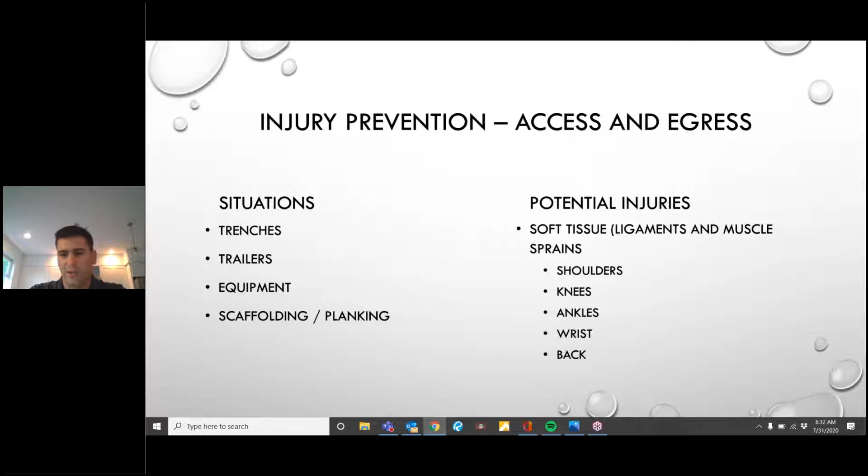The potential injuries we're trying to avoid are soft tissue injuries, ligament and muscle sprains. That's what we see when getting in and out of trenches, trailers, or equipment, or working on scaffolding or planking, when we slip a little and injure a shoulder, a knee, twist an ankle, hurt our wrist, or injure our back. So we're going to talk about those different scenarios.

The first one here is excavating and trenching. We want proper means of egress anytime our trench or excavation is deeper than 4 feet. But even at 4 feet, even at 2 feet, the constant strain of doing a 2-foot or 3-foot lunge out of an excavation each and every day adds up, because of the frequency, how much we're in and out of these things carrying tools and objects.

Anytime we can do a nice slope, like you see at the UVM project, on the left-hand slide, this nice gradual slope to get down and perform all the concrete and pipe work that needs to be done, it's a nice means of egress. On the right here we've got a ladder for trench work, so we can have good 3 points of contact getting in and out of our trenches.

We see a lot of times where an employee might slip, or the bank might give out - this is just a 2-foot excavation or trench where you slide down the bank. I think we've all been in those situations where you just slide in and out, and those are all opportunities for a potential injury or strain to occur.

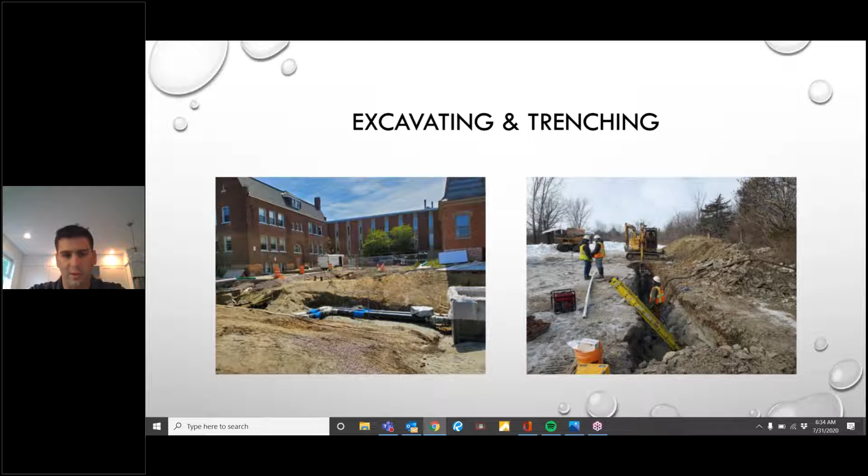So anytime we can have a designated means of egress, a nice earthen gradual slope in, that stone that can prevent any slipping or tripping hazards, is our best practice to avoid those situations. Now regarding trailers, we've had a lot of accidents in the last decade on trailers, and a lot of it's access and means of egress, jumping off and on like you see on the slide on the left-hand side.

How many times do we go up and down this? It's about a 34-inch drop off, constantly lunging, climbing. There's a high probability due to the amount of frequency and overreaching that has to be done each and every day to get up.

So we've purchased and invested a lot into these little step deck or trailer ladder systems that you see on the right-hand side. Easy means of egress, a lot easier on our joints and knees, to get in and out using 3 points of contact. It's a lot safer and more efficient, because we do appreciate the sense of urgency all of our employees give each and every day.

But again, we don't want you to sacrifice your health due to that sense of urgency or potential unsafe behavior preventing a shortcut. So let's think out of the box sometimes about how we can make an activity safer and easier on each other. Adding ladder systems to our trailers is something we've been doing for the last 2+ years.

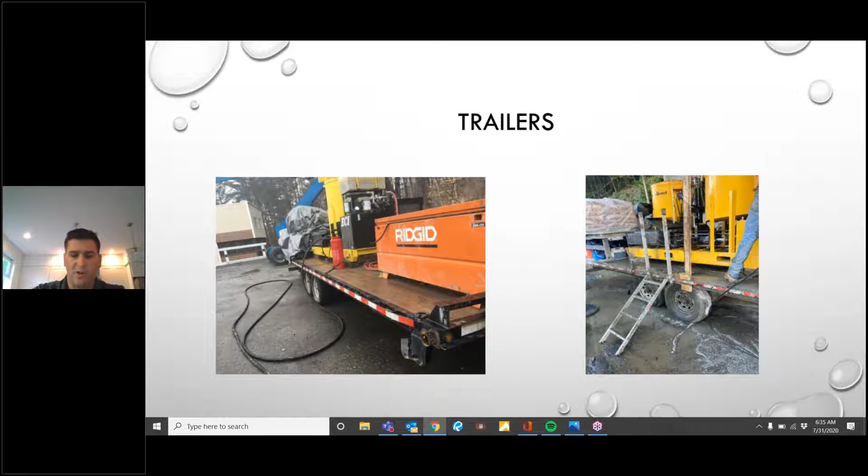So if there's a situation that you need a ladder for, please let us know and we can get one coming. And then equipment, we have a lot of times where we're accessing equipment, you're talking 50 to 100 times a day in some cases. We appreciate the sense of urgency to get out and help somebody on the ground, but we need to make sure we're doing it safely as well.

This is right out of the operator's manual of a John Deere excavator on the safety pages. To use handholds and steps, falling is one of the major causes of personal injury. When you get on and off a machine, always maintain 3 points of contact with the steps and handrails and face the machine, and do not use any controls as handholds. Never jump on or off a machine, never mount or dismount a moving machine, and always be careful of slippery conditions on platforms, steps, and handrails when leaving the machine.

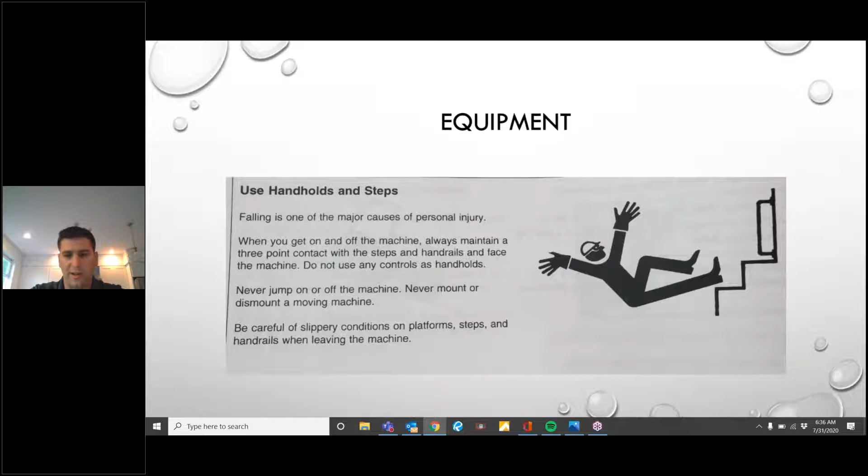We see, usually each year, a number of potential recordable injuries or soft tissue injuries regarding mounting and dismounting equipment. So this is a really important topic to maintain our 182-day record and moving forward into that 200 and beyond threshold, making sure we don't take unnecessary risks mounting and dismounting equipment.

And the last one here is our scaffolding and planking, a big exposure with all the concrete work. This is mostly our concrete workers, some of our rail workers as well, where we have these situations working on planking and some type of scaffolding system, whether it's a form scaffold system or a standard tube and coupler scaffolding system. You can see here we're working on planking, so we always want to make sure we inspect our planking all the time and have good means of egress to get on and off it.

The slide on the right, you can see where instead of working off and jumping on and off ladders, we built a nice little easy access bridge to get onto our formwork and beyond. It's a nice little tool, and it saves a lot of the muscle strains you might get from always climbing on and off things. When it comes to safety and injury prevention, it's all about looking at your risk and probability, and weighing those to make good, healthy decisions, like how can we reduce potential over-exertion by spending 30 minutes to build a nice little bridge. It definitely was well worth it, and that project went really smooth because of it.

Those are some important topics I wanted to share with everybody today, because for us to maintain our excellent safety record in 2020 and moving into our historically higher injury seasons of August, September, and October, these next 3 months are going to be very big, as the hot days and repeat hazards that we might get complacent with come up and bite us and potentially injure one of us. That's what we're here to try to prevent and raise awareness of in these 4 areas, because they're very critical to making sure we don't let our guards down.

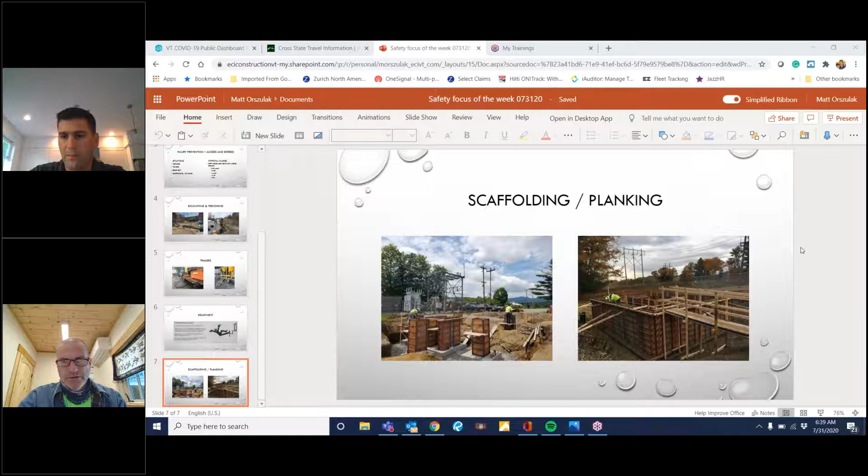It says injury prevention, I thought I changed the topic. I guess I didn't. Anyway, same type of theme anyway, to prevent injuries, and today was egress and access. So very good topics for sure.

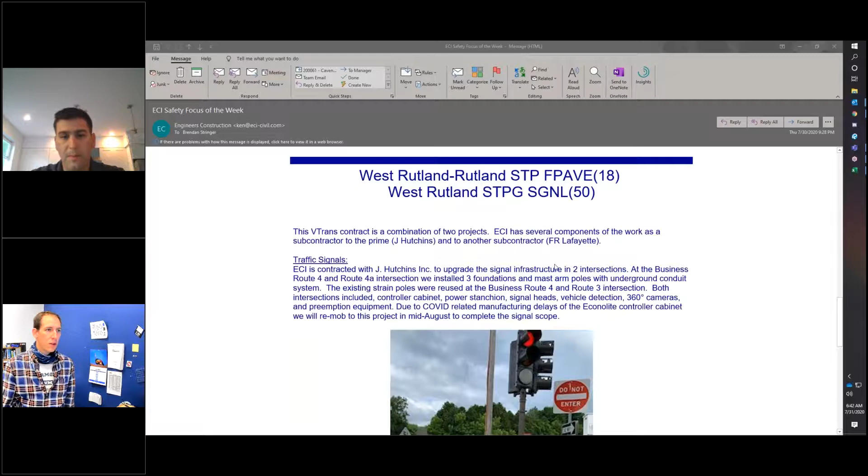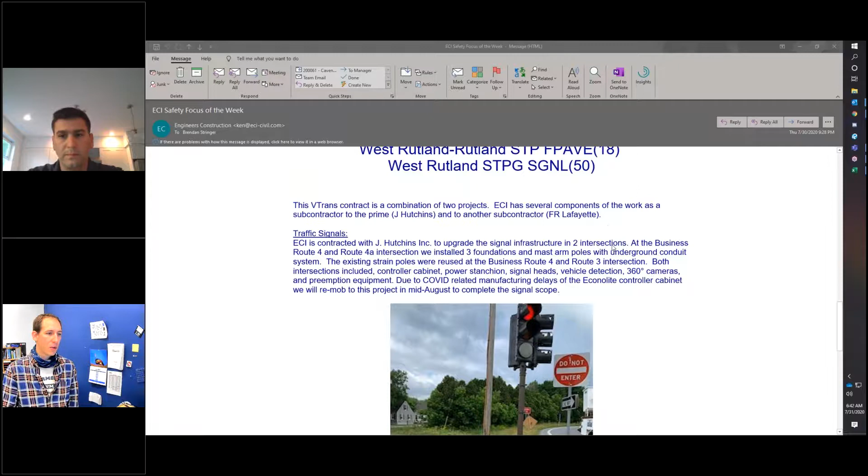Perfect. So we're going to highlight the West Rutland FPAVE project. For this project, ECI is a sub to Hutchins, but we're also a second tier sub to FR Lafayette. So we'll go through the different components of work that we have. The first component is the traffic signal work.

There are 2 intersections where ECI was contracted to perform signal upgrades. At the Route 4 and Route 4A intersection, we're responsible for installing 3 new mast arm poles and foundations. We're installing all of the associated conduit runs and junction boxes, and then we also installed new signal heads, vehicle detection, preemption, 360-degree cameras, and other associated equipment.

There was another component of this project on the Vermont Route 3 and Route 4 intersection. At this location, there was an existing strain pole. Our contract was just to remove the signals off of the strain wire and then replace them with an upgraded signal system, including preemption and vehicle detection, and kind of all the standard things that we would normally see.

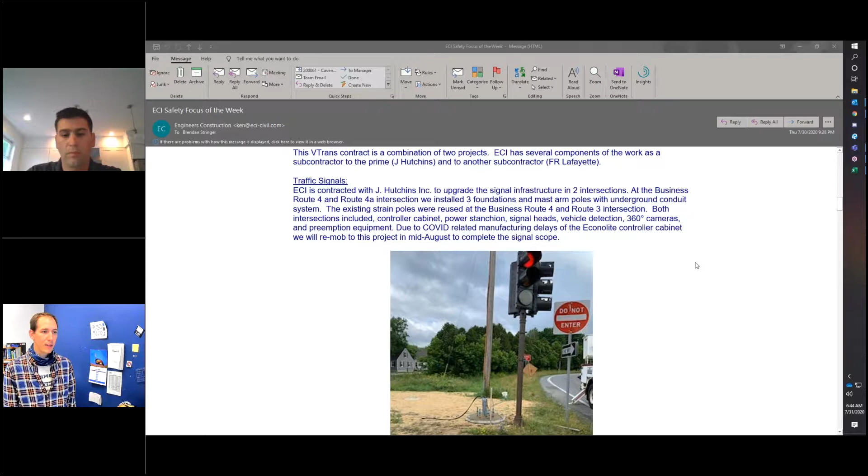Unfortunately, we've run into a couple hiccups along the way with this, primarily due to COVID. The biggest one is that there's been some manufacturing delays with the controller cabinets that control all the signal systems on the 2 intersections. So we're going to end up remobbing to this project in mid-August to complete the signal scope. Currently, the mast arm poles are up and all of the underground work is complete, and now we're just waiting to install the signals and get the intersections up and running.

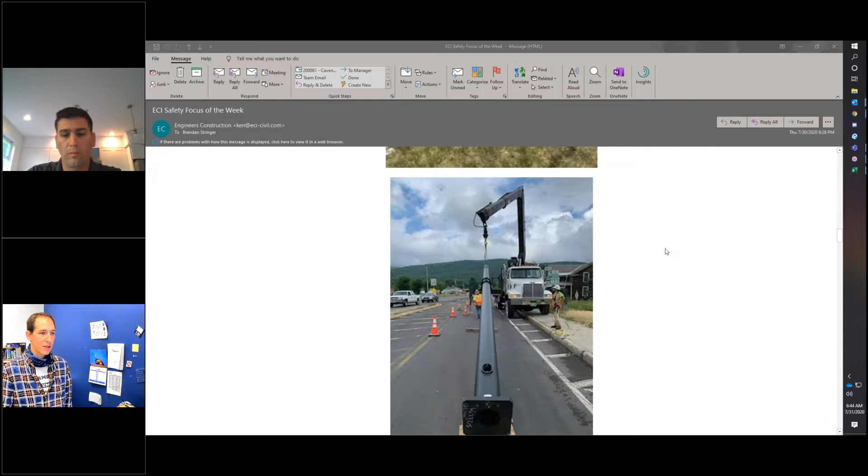So you can see here, looks like mast arm pole foundations, driving the casings, setting the mast arm poles, hanging luminaire brackets.

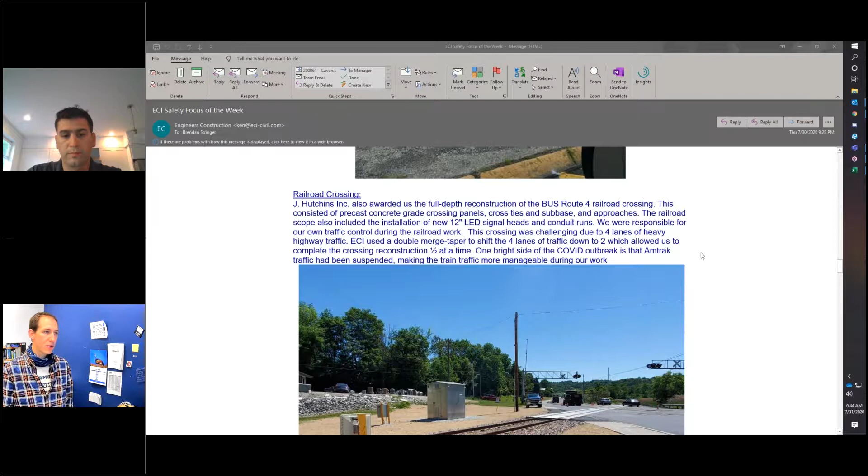Another component of this work is that there was a railroad crossing scope. Just a little bit up the road from the Route 4 and Route 4A intersection, there's a railroad crossing, and we were contracted as part of the same project to go in and do a full depth reconstruction.

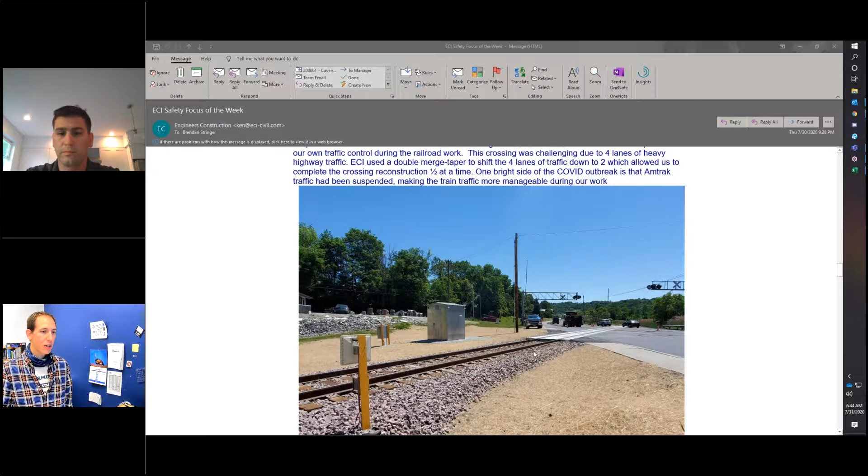You can see in this picture here the completed work. Ron's guys came through and they dug out the existing intersection, removed the existing crossing, and then put in new ballast, new ties, new precast crossing panels, and some other associated work like conduit runs and under drains. And then they also replaced all the existing signal heads with new 12-inch LED signal heads.

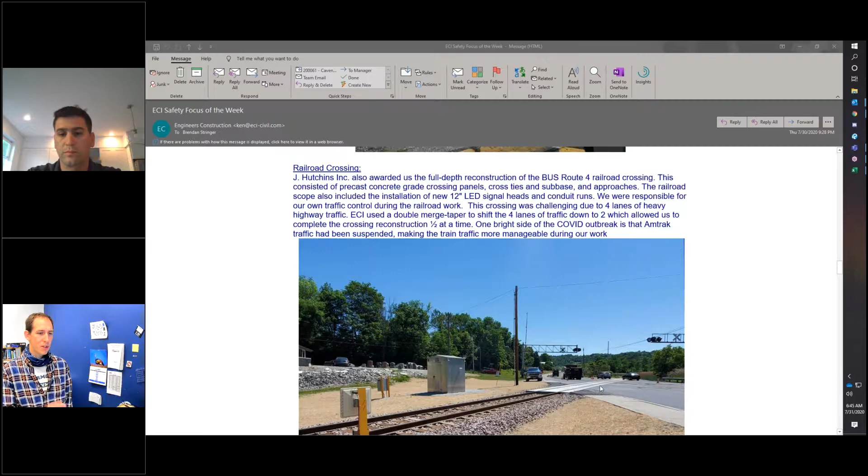This was done over 2 phases where we had traffic shifting from one side of the road to the other.

And then the last component of work is the overhead sign foundations. Before you get to the business Route 4 and Route 4A intersection, the state had 2 overhead signs, which are the sign structures that come up vertically and span the entire road. Those structures required drilled shaft foundations.

We were actually hired by Lafayette as a second tier sub to install 8 drilled shaft foundations. These were 30-inch diameter and approximately 16 feet below grade.

On the overhead foundations, we encountered just a ridiculous amount of groundwater. So we ended up overdriving the casings by 8 feet, and then that sufficiently cut off the groundwater for us to finish cleaning out the casings and get down to final depth.

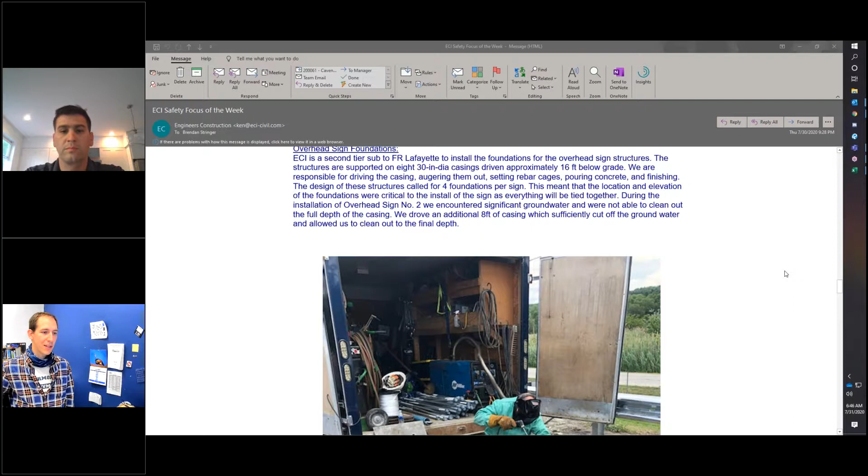It looks like there's Mark welding up our collars. For us, a 30-inch casing is a little bit non-standard because most of what we designed in-house is 42-inch, so we had to fabricate some templates.

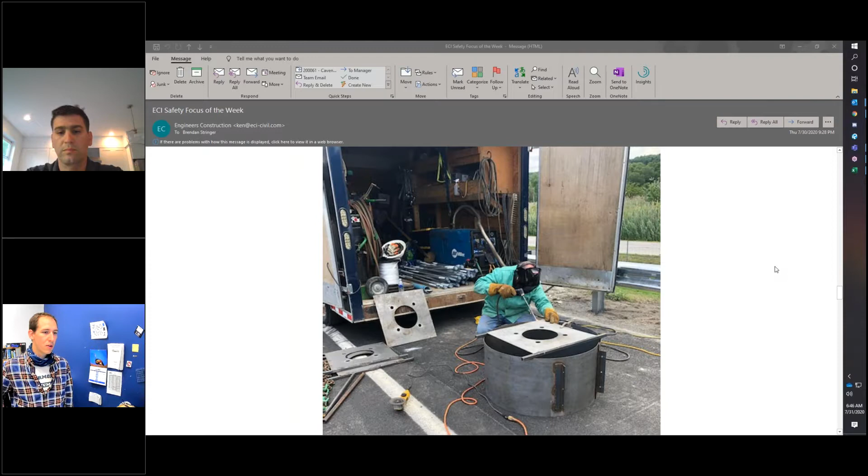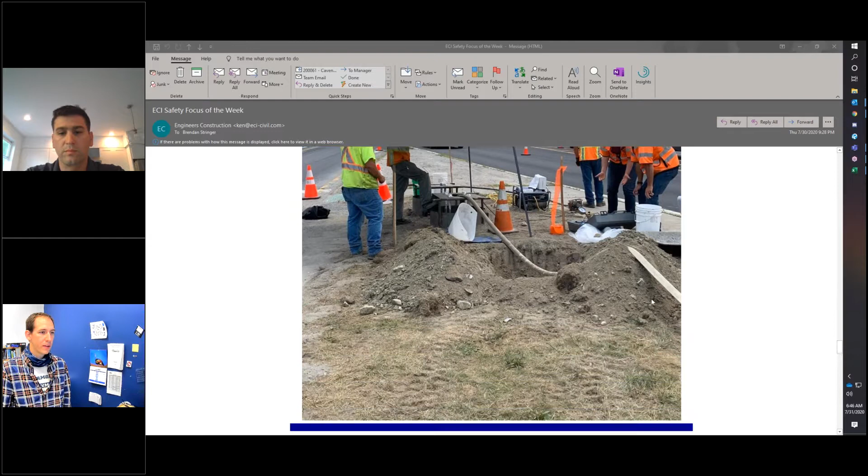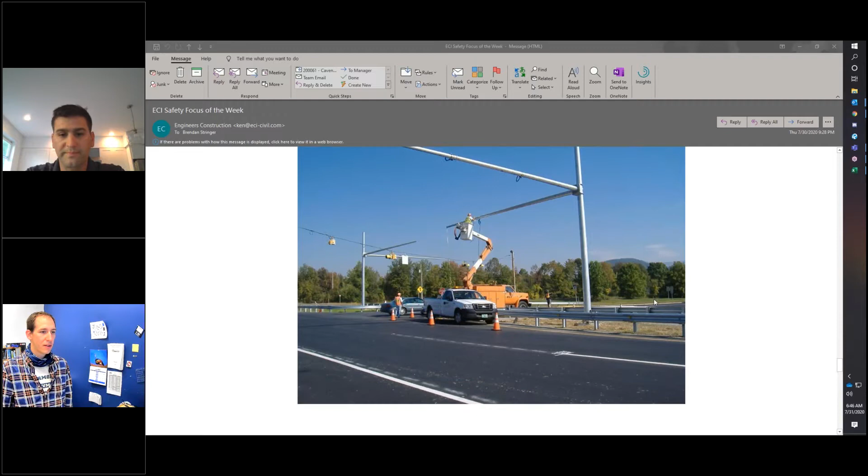And that's all I got. Thank you everybody, thank you.